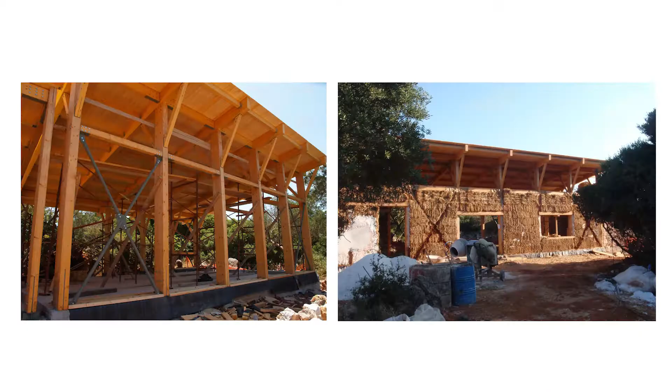The statical study was done by an engineer here in Chania, Anastasios Andreadakis. He's here also, Antonia. Antonia is also a member of Pilico. That was our first building with natural materials in Crete. I consider this building a very big luck, because sometimes we are waiting for a project to come and it doesn't come, and when we started to love natural materials, we had a very nice chance to do it with a client that wanted very much to work with natural materials.

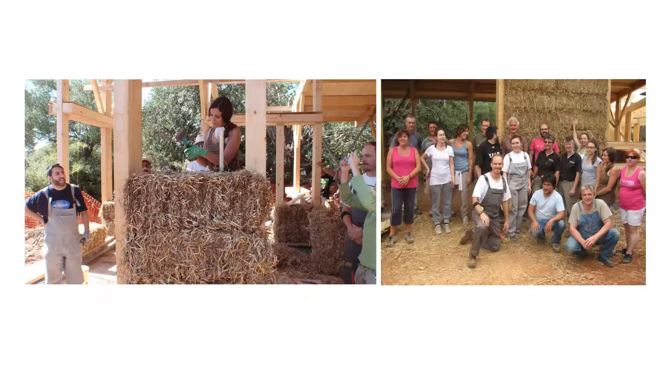This project was made from a timber frame load-bearing structure. All the filling walls, the outside walls, were straw bales of 50 centimeters thickness. We had workshops for the straw bale constructions together with Amazon Nails. At that time it was a group of women living in the United Kingdom, working with straw bale constructions and giving workshops all over the world about these techniques.

The final product, so to say, was very loved by the people in the environment, and this was also a very nice experience for us. I want to say that before building this building, the client wanted to have contact with the local community. We had several talks about this project so that people living in that area could embrace it, could love it, so they would be ready to use it after the construction.

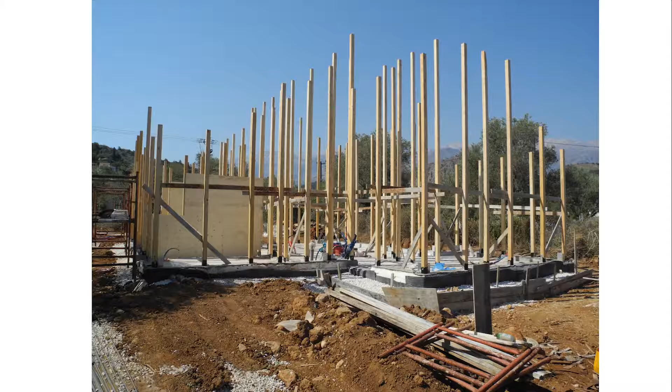The second project was a single-story house in the settlement of Neochorio here in Chania. Here we were using a light clay technique. The construction was done in 2013 and 2014. This building was designed and constructed with, again, a load-bearing timber frame. The study was done by engineer Eleftheria Tsakanika, who was a speaker here yesterday. We used the light clay technique in this building for the first time. It was a very nice technique, and we slowly realized that it can have very good results in the use of the building during the whole year.

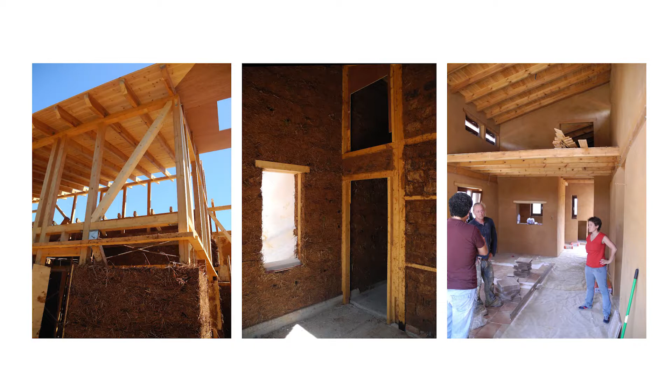Inside, we also had some adobe brick walls. You can see them here. And the plasters that we used are earth and lime plasters, and lime plasters only in the wet areas. Here you can see some outside views and the inside of the space.

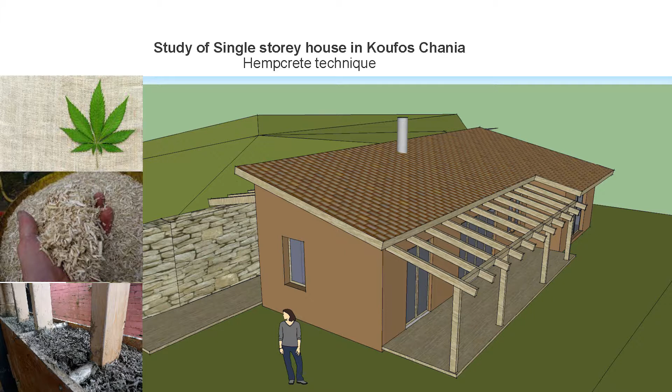We had a study of a single-story house in Koufos in Chania that has remained at the study stage till now. Again, the static engineer was Tassos Andreadakis. The technique that the client wanted to use here was hempcrete, from hemp that, of course, we don't have here and have to import.

This is another project. It's very common here in Greece, and especially in Crete, to work in a context, in the city or in a village. Sometimes the village is a traditional village. So in this case, the question was, is it possible in a traditional village to build with natural materials, to build with the light clay system, for example? We work with this system because we think it is appropriate for Greece.

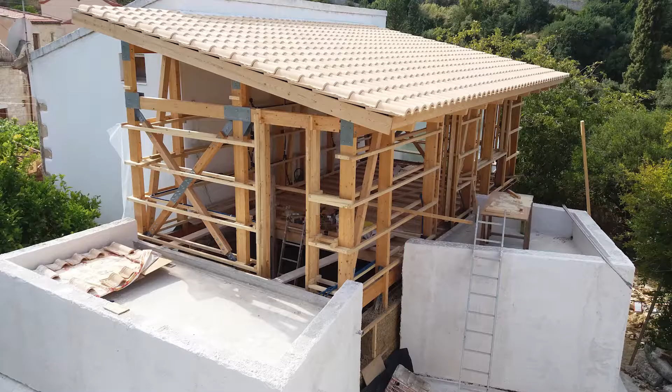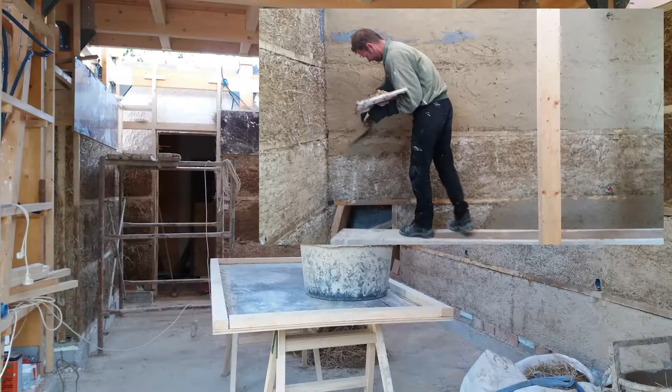We worked in time without serious problems, and we could do it. That means that we had to put this house very close to other houses, to adapt with very big attention to the site, and anyway, we had some.

We worked with different techniques like plasters, earth plasters, lime plasters, wooden constructions. I can tell that it is not very difficult. We have not a lot of experience, but I can tell that it is something that somebody can do. So there are techniques that they go on.

Okay. There are some pictures of the inside of the house and the outside. About the static, it was again Anastasios Andreadakis, the civil engineer. In the static we have some technical problems that I think in this case it is not necessary to speak about.

Okay. Then, this is another project that is not built yet, but we are going on with the permissions. It is in the city. It's a third-floor construction on an existing house, and we try to adapt our techniques to the urban context.

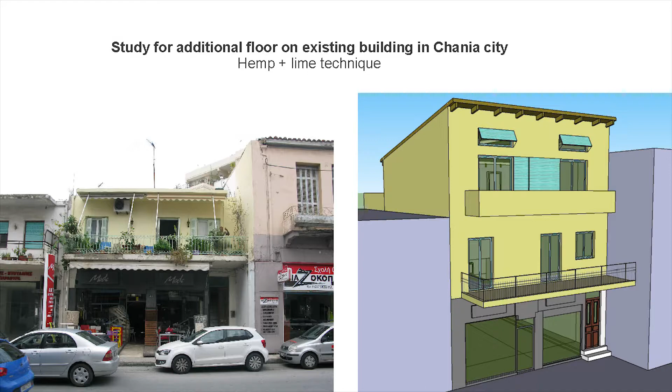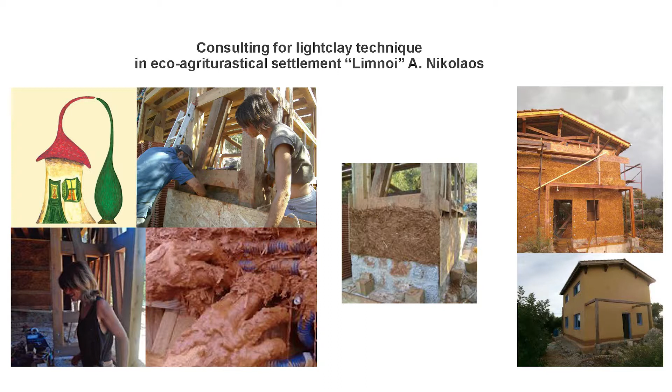Here was a consulting work of ours in a project that was done by other architects in Agios Nikolaos, in an eco-agritouristic settlement called Limnoi. This woman, who is an amazing person, has done all this work self-constructed together with 2 workers. We went there to give consultancy about how to build the walls with the light clay technique. Christelle has already finished 2 buildings, with very good results.

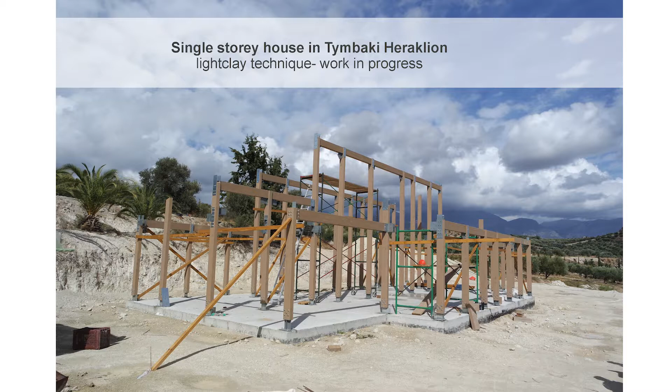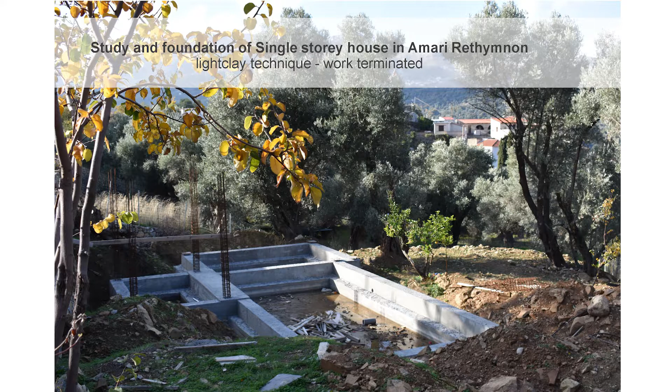This was one house that we started to build, but finally the client decided not to build with natural materials anymore. She changed her mind. Probably we were, I don't know, scary, and even if it took a lot of time to go through all the procedures to get the license to demolish an older house that was there, and of course to start with the construction, finally she decided not to go on, so the works were terminated at the stage of the foundation.

So the experience is not always good. So this is life. So we had to adapt. Finally, we are here because we wanted to talk about the problems, the easy things and the problematic things that we have faced during these last years with natural materials constructions in Greece.

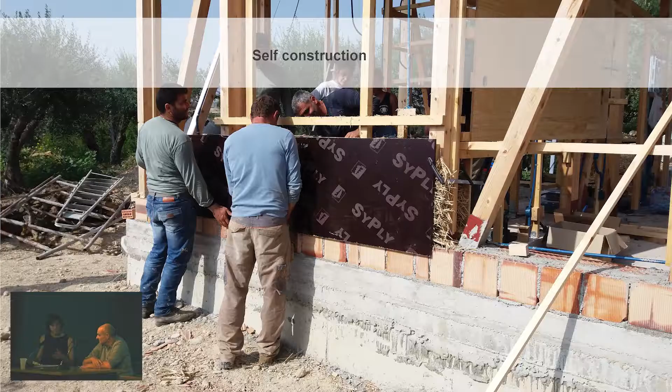First of all, it's the thing of the client. We strongly believe that the person who wants to build with natural materials has to have a strong philosophy that can support these buildings. It is very difficult to convince somebody, at least in our local environment, to build with these materials. They are feeling insecure. Mostly, they don't know the techniques. They are asking, what will happen? Will it fall? What about the earthquake? What about the mice? They find obstacles, and many of them do not want to listen about these techniques.

We had the opportunity to work with people who have also participated in the construction. For example, this person is the owner of his own house. He has worked together with workers, and it was at a period where he had no work. That's important because for him, all this free time was filled with building his own house.

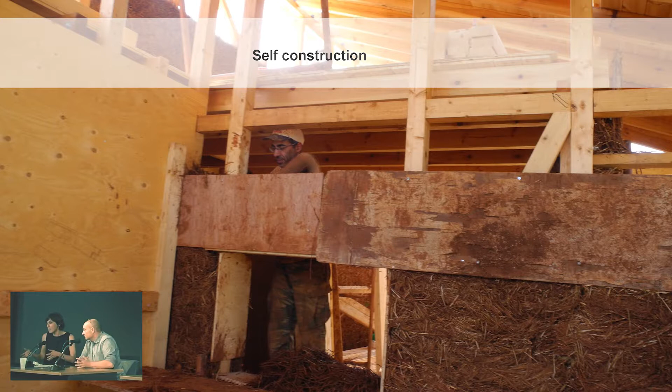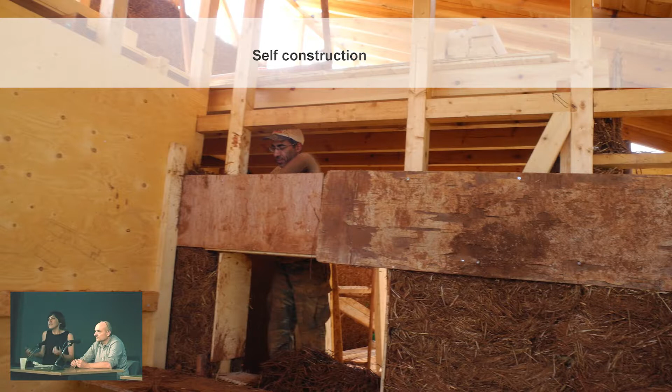And of course, we know that in this kind of structure, it is very good for the persons who use them and live inside them to know the construction, to know the problems that might occur, to be ready to solve any that arise. And when they live inside the space, they feel more safe that they can handle the whole building, and not that they need somebody else to come and solve their problem.

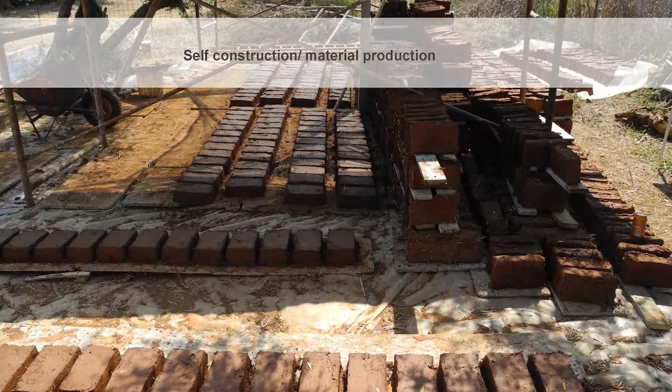So, for example, here when we do clay, we keep some material from our plaster, and when a problem occurs, the builder, the owner, knows that he can reuse the material he has by himself in a hole or a crack, which is a very important issue. Of course, for these constructions, many times we produce the material on site.

These bricks, for example, were constructed for this house in Neochorio by the owner and the workers, sun-dried there and directly used in the construction. And this is the previous one that we have shown you, the house in Kufos, that was a one-story house.

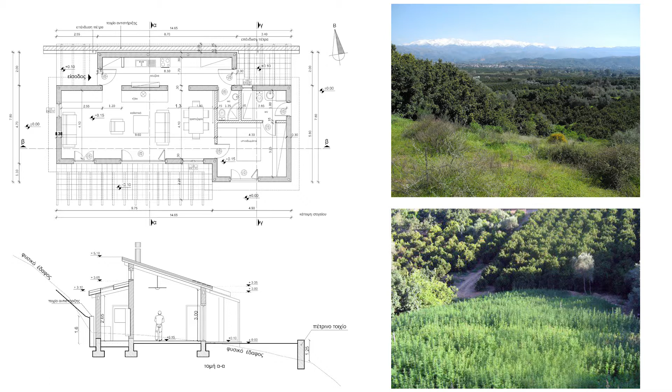Here we also have a person that is very conscious about natural building materials. On the upper photo you see the plot, on the photo below you see the plot with the legal cultivation of industrial hemp. He was one of the few persons that have legal cultivation of hemp in Greece, because the law came out some years ago, and he is very proud of using his own material, with the idea of using his own production for constructing the house.

Here, of course, yes, I said the problematic before. I don't think that I have to say things about this.

Now, the design was one of the aspects that gives a big problematic, which means the problems that we face every time we have a new project, and the design that we do needs some special technical knowledge, which is not very difficult to achieve, but needs a background that we have to search or support.

Usually, what we want to apply in our constructions is, first of all, a bioclimatic design in combination with a shell that has natural materials. This we cannot always achieve 100%. That's why we combine with conventional materials in several stages of the house. For example, foundations we usually make from cement. This also makes the client feel more comfortable and safe that the house is based on very good foundations that he already knows.

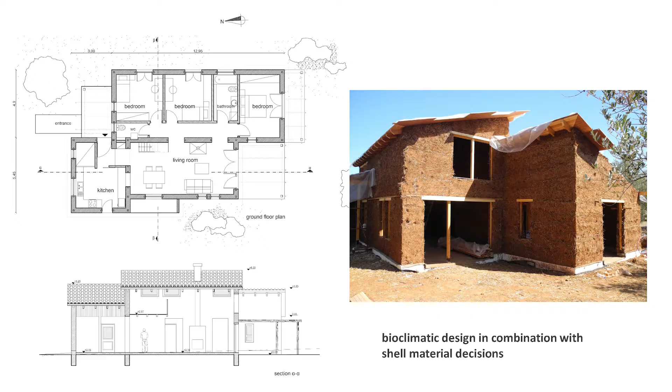Of course, choosing the right technique, as Eleftheria Tsakanika told us yesterday, is a very important thing, because every time we also have to face some new problems. We have realized that, for example, light clay is a technique that we can manage, it's easy, and of course gives us a result of walls that do not have different materials on their face.

Because we have to use load-bearing structures and non-load-bearing walls in Greece, we have to incorporate our load-bearing frame inside the wall.

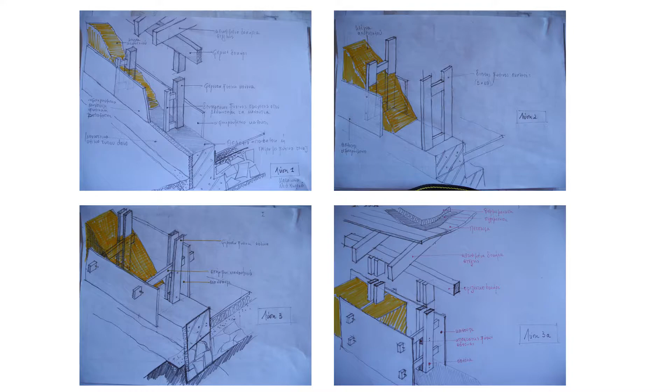So many times when we have to use materials like adobes or straw bales, this is a very laborious procedure, because we have to cut the adobes and put them inside the timber frame, which creates many problems. As you see, as we had in this construction, the first one with the straw bales, when we had a wind diagonal, we had to cut the bale so that it can go through the diagonals and the columns. This is a very big problem.

These are some photos of the foundations that we told you about before. Materials, the use of the materials. Another thing that changes when we move to another conception is the new materials. It's not easy to find, for example, straw bales in Crete, and it's not easy to move them. The cost changes. We have to manage earth or lime. Lime, for example, usually is not of good quality, so we have to look for it, or take it and prepare it for some months.

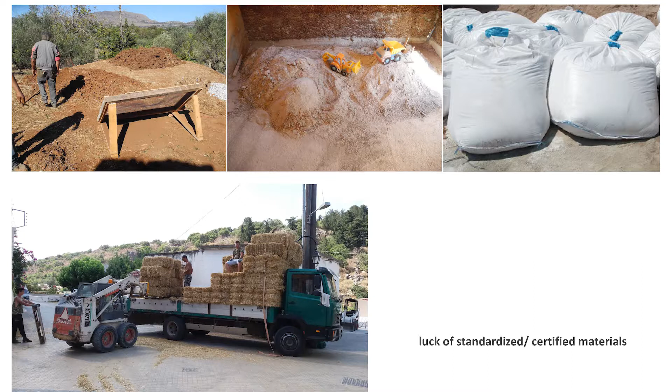This makes our work more artisanal, so to say, and sometimes not so professional. Even if our thought is professional, the work is sometimes an experiment that we have to do as engineers, and we teach, of course, the people that collaborate with us in the building.

Another interesting aspect that we have faced is the timber frame and, of course, certification issues. For example, in Greece, we don't have natural wood which is certified for its statical strength.

So we usually have to use glulam timber frame so that we have specific particular specifications, and so that the engineer can calculate all the behavior of the building based on something that he's sure of. Of course, engineers differ.

The engineer's approach differs. Here, for example, you see the columns and their connection with the foundations in two different approaches. One system is lighter, and it's probably the more common. The other one is heavier. It has more specific and measured places where every hole is done and every bolt.

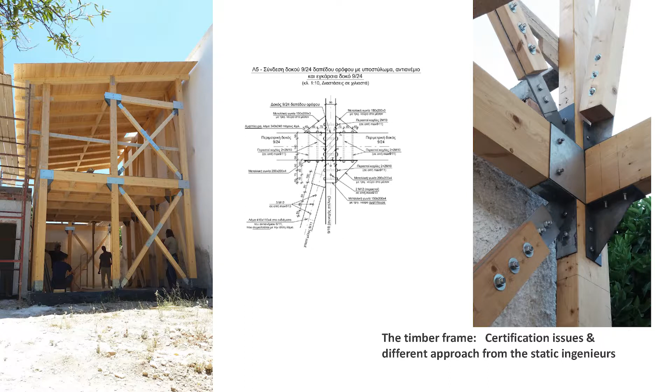Or, of course, other approaches like this, for example, which we have experienced. This is another way of junction. Here we don't use all these metal elements. This is another approach. And of course here, for example, together with these diagonals,

we had this OSB, the diaphragmatic function of walls that are done with timber materials, okay? Which some people think is not okay, some others think is okay. So we are in the middle somehow many times, and we say, okay, is it better? Is it easier? Can we do it another way?

This is the thing of integration. Okay, integration is something very important. Anyway, it's the site, the organization of time. Okay, we spoke about it just before. Yeah, I wanted to say about this.

For example, here you see the two buildings are covered with plastic. Why? Because we had rain. The one above didn't manage to finish within the summer period, so the rain started, the wall was still not dry, and we cannot apply the next layer, because if we do, we will have cracks and problems. So everything has to be calculated at the right time, which can never be calculated at the right time, because the authority probably does not give us the license before this summer. So we have to wait till next summer to build, because otherwise we might have problems in our construction.

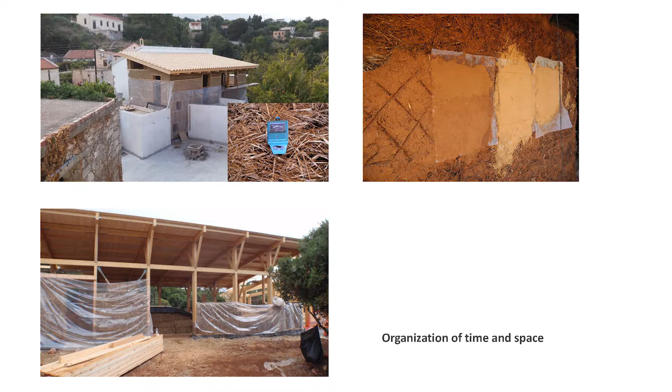Here we can see some ways that we have used. We can speak a little about the workers. Usually our experience is that it is not necessary for more than one or two persons inside to have a big knowledge. It's very easy to instruct simple workers to do some work, and the work goes on. And this is very useful for the construction.

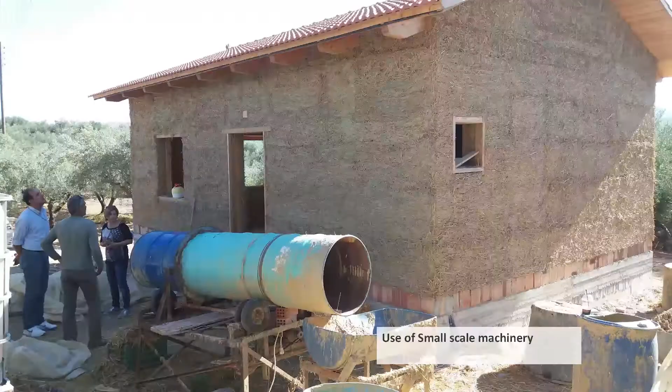Here we can see the photo. Sometimes, yes, this is interesting, because sometimes we have to manage some new instrument for the construction. For example, in this case, the owner made this machine that we use to prepare the light clay material. In other situations, we have to prepare or find other instruments and use them every time. So we have to think every time and discover new things.

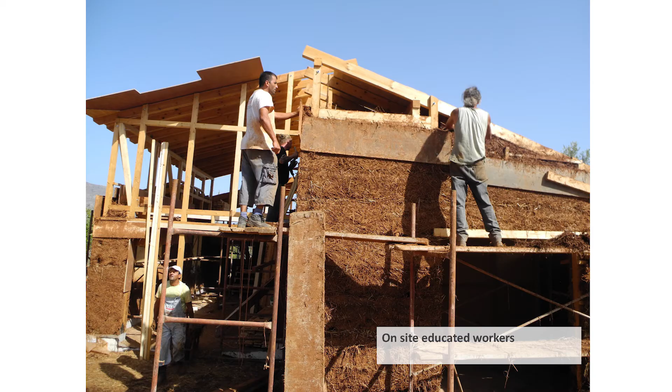And this is, of course, because till now we have worked on projects that were different, and that we were doing for the first or the second time. So we slowly start to have experience additional to the previous one, and we hope that this will facilitate our work, because in the beginning this is sometimes not stressful, but really strange.

30 centimeters, together with the plaster 35 maximum. And we have a class B building behavior, class B energetic. And most of them use either passive means of heating and cooling, or renewable energy solutions.

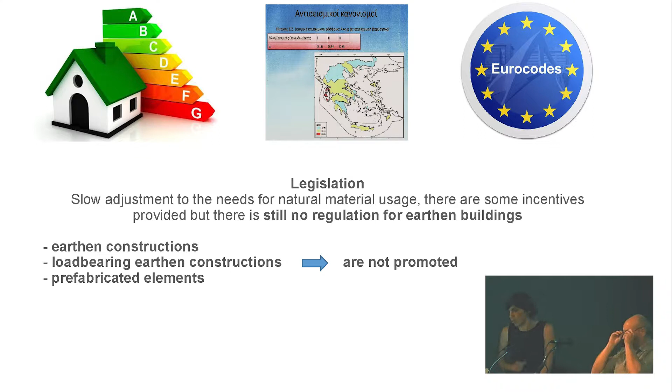The legislation is this. Okay, we can say just two words about the legislation and about the relationship with the public administration.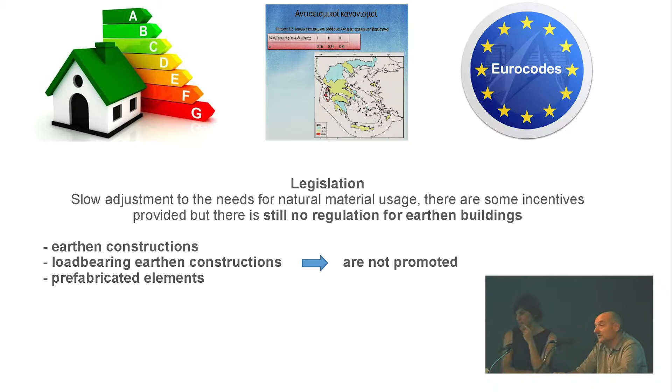Our works, we can tell that we hadn't a serious problem with the public administration. Usually they were very positive to us, so at maximum we had the same problems as conventional construction. So at the moment, I don't know about the future, but at the moment we don't have serious problems.

About the legislation, we have all the European legislation that covers a big part of our works in statics, like the Eurocode or the energetic legislation. We think that in the future we must have more specific normatives about natural materials. This is something we try to go on and start to do something about.

And of course, because we have the earthquake issue here in our country, one of the most important things we consider is how the timber frame together with the wall can collaborate. Because till now, engineers calculate the structure as if no wall exists, even though this is a very important matter where they could probably collaborate. But we don't have any research results to base a regulation on, or to receive a regulation from the country that can assure our building has good seismic behavior.

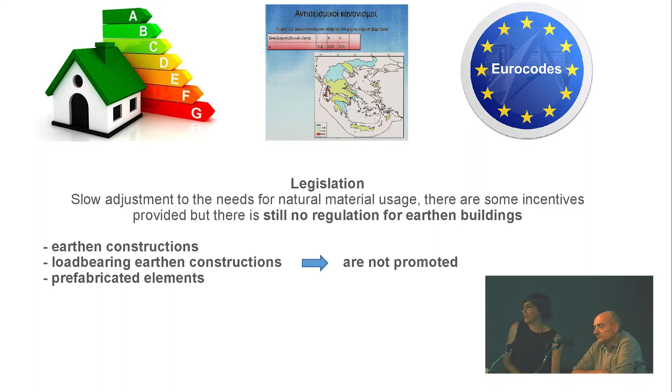Okay, we are in the middle of a way. We are not conclusive, we don't have exactly a system that we have to repeat every time. Every time we have to change it, we have to perfect it, study it, experiment, and go on. This is our philosophy.

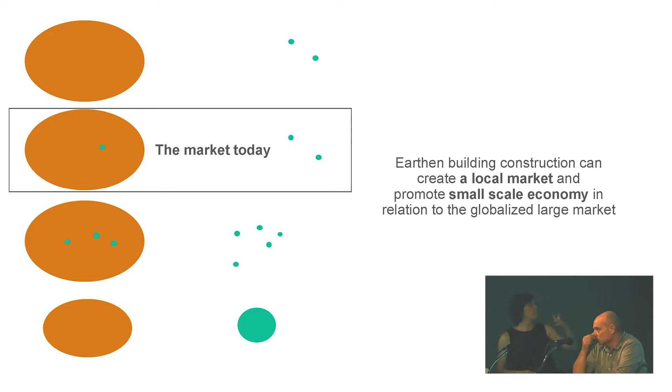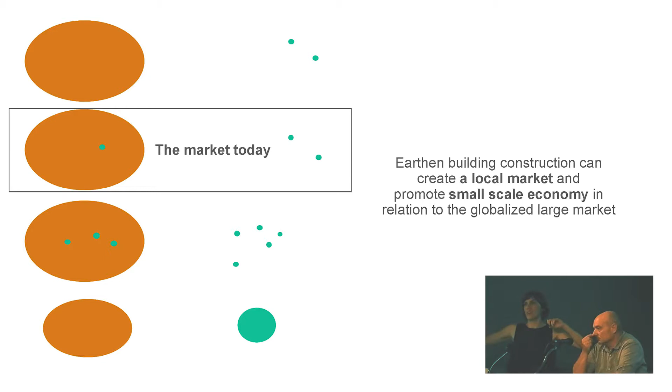And of course, the market as it is today - we have the conventional buildings that have the biggest proportion of the pie, so to say, and very small initiatives from the other part, natural building construction, slowly coming inside the conventional design, entering some ideas and applying these materials.

And of course, in the future we want this to multiply, so that we have another market rising to receive better regulation, to receive some materials that are prefabricated, because this is a very big lack in the market. And because we think this construction can create a local market - for example, we have a lot of clay in Crete, different clays in Crete.

This is something we realized slowly in the process, because through contact with the university, together with Professor Markopoulos some years ago, we participated in a program on the thermal isolation of building materials. We realized in this research that we have many different types of clays just in the region around the city of Chania, which is very encouraging to continue with this matter.

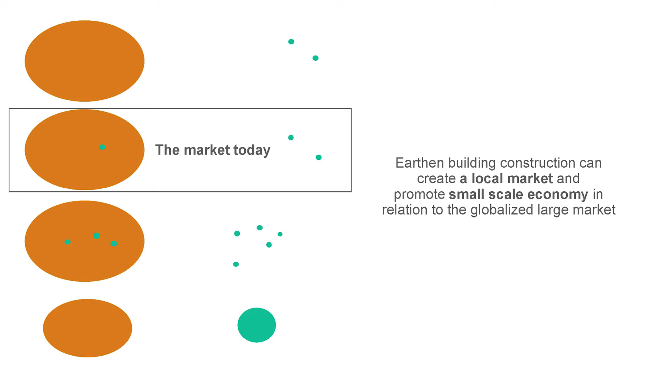The economic parameter is very important for everybody, especially for the owner. And we can tell that working with natural material is better for a local community - we have more hours, more workers to work there, the materials are from the local market, and for sure this is more sustainable.

The personal vision, so to say, is that we can live from our work. Till now it is difficult to live doing only projects with earth. And of course this is the aim, so that it's important for an engineer, for an architect, to be able to live from his work.